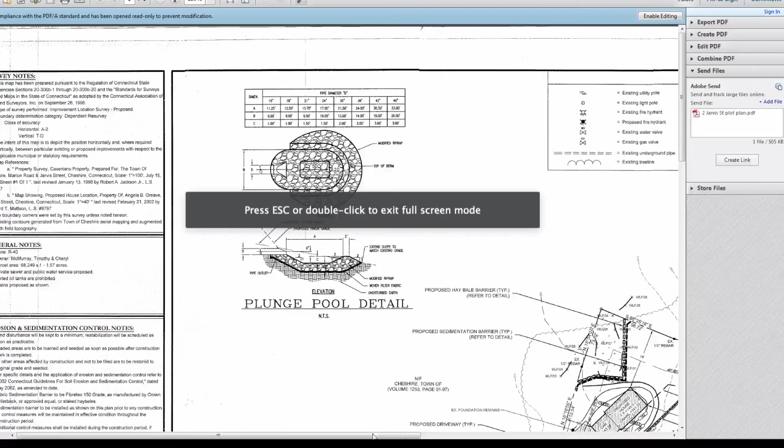And again, Charles, I'm just looking for clarification here because it almost makes sense to me that it's like this, or while it looks like an error, it also looks like it might be just illustrating that the 140 runs for a while and they just threw it in there. But I don't know. There it is. Can members see this okay? Yeah, okay.

140, 140. 138 is here. You don't have your little pointer thing? So we have the 140 - oh, there you go. Thank you - and 140, and where's the 138? Okay, gotcha. If you carry them to where they join existing contours, it looks like one of them joins the existing 140 and the other 140 joins the existing 142.

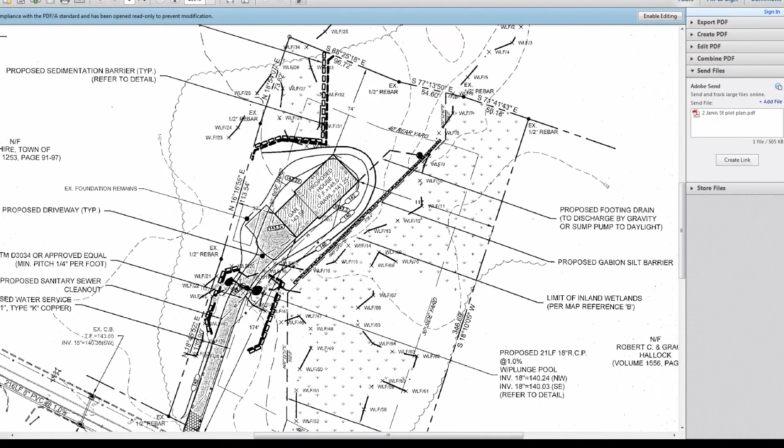So that is going to have to be a clarification from the person that designed the site plan. Yeah, it doesn't affect the overall plan in that when they finally go out there and do that, they're just going to have to make it work with a bulldozer or a tractor anyway. It still has to go from point A to point B, and whether the topos are named or not, the water needs to flow the way they want the water to flow.

So other than that, our major concern from the beginning has been that this house is awfully close to the wetlands on the eastern side there, and there are erosion controls being proposed here. The thing that worries me as much as anything else is we've seen sites like this where it looks fine on paper, and then on the site itself, we start running into problems. I think some of you remember some of these other sites where you're putting fill in fairly close to an actual wetland, as is happening near at least the front of the house there. So I'm not necessarily opposed to what's being proposed here, I just want to make absolutely certain that we've got the proper protection and inspection on this going in.

On another issue, did you determine whether a conservation easement was established, or is that something that was not? In looking at the land records, I did not find any conservation easement that was created and recorded on the land records. It was mentioned in the 2002 approval, it was a stipulation of that approval, but since that site was not developed, I believe there was no reason to institute that easement.

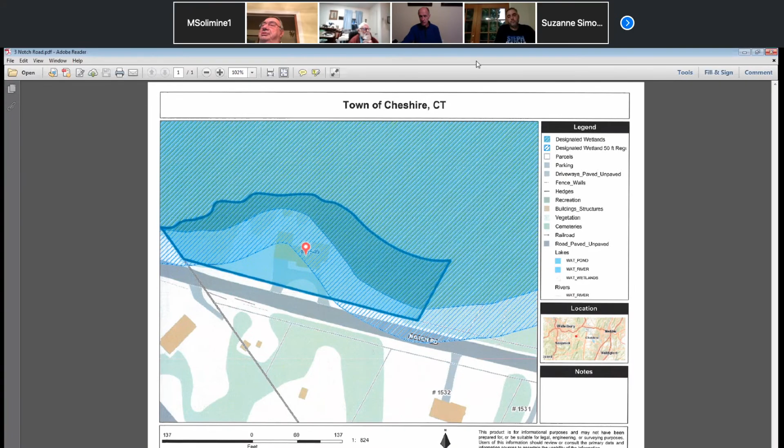Is there a motion to declare it insignificant in regard to the wetlands requirements? Yeah, I will so move that the proposed activities are insignificant in terms of disturbance of the wetland environment and therefore would not require a permit under our regulations. I'll second that.

Moved and seconded. Any discussion? Seeing none, all those in favor of the motion, say aye. Aye. Opposed? Motion carried by those commission members present.

Thank you, everyone. On to the next item of new business. So, Suzanne, you're all set as far as this is concerned for 1540 Notch Road. You'll just need to fill out a zoning permit, and that'll get processed through our office, and I'll be able to indicate that a wetlands permit is not needed.

Yeah, we did already last week. He was waiting on the wetlands decision. Okay, all right, then I'll follow up with Mike and we'll get that processed. Thank you. Thank you so much. Okay, you're welcome. Thank you, everybody. Stay safe. Thank you too.

Okay, Suzanne, item number 2. Yes, the second item under new business is a new application for a site plan, home and grading on Coleman Road. Representing this application is Dennis McMorrow, who is on our screen. Hello, evening, Dennis, how are you? Good, how are you? I'm great, thanks.

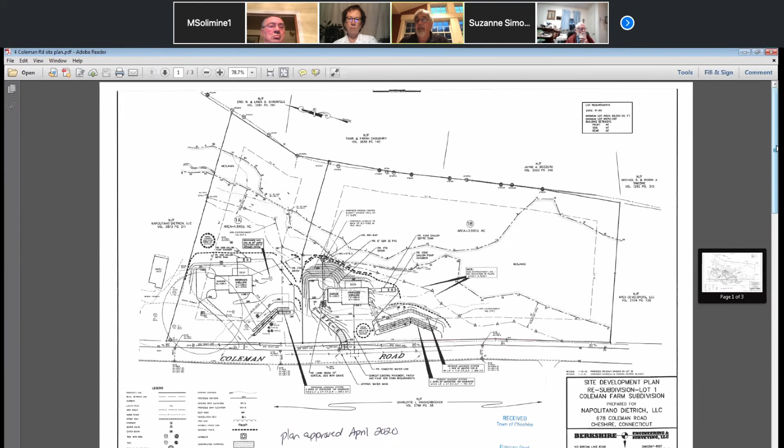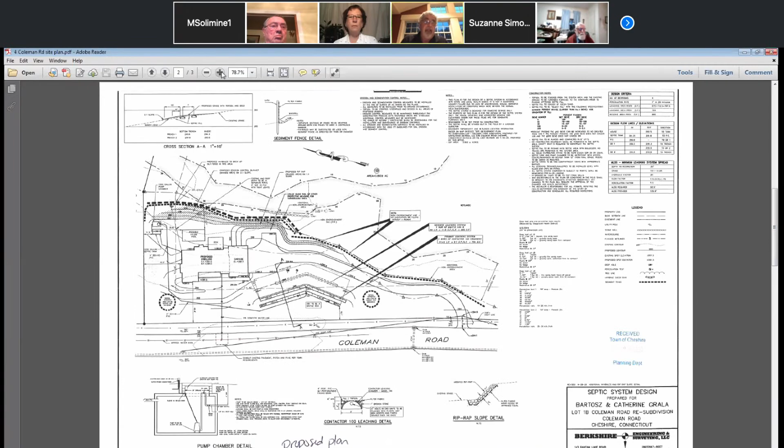The Gralas purchased Lot 1B from Napolitano Dietrich, and they're looking to construct a house for themselves and live there. The goal for this new plan is to get a little bit of a backyard. On the previous plan that we just moved away from, there's really no backyard - everything's to the side. So what we looked at was, could we find another driveway location that would meet the sight lines that the traffic authority would want for Coleman Road?

And we did find that - the driveway is about 300 feet to the south of the property. So we're looking at that site plan. The driveway is now coming in from the south side. It's a much flatter driveway - we have a maximum slope of about 2% on this driveway versus the 10%. The trade-off is it's about twice as long as the other driveway, 140 feet versus this 300 feet.

But it does a couple of things that are positive. One, it meets the sightline criteria - I did have a discussion with traffic. Two, we only have an 8-foot high fill slope going down to the wetlands instead of a 14-foot high fill slope, so we've almost cut the depth in half.

Part of it by the turnaround is a 1-to-1 rock slope, and I'll get into that in a minute. But we're still only an 8-foot high slope, whether it's 2-to-1 with fabric or 1-to-1 with the stone face on it. We couldn't - go ahead, you have a question?

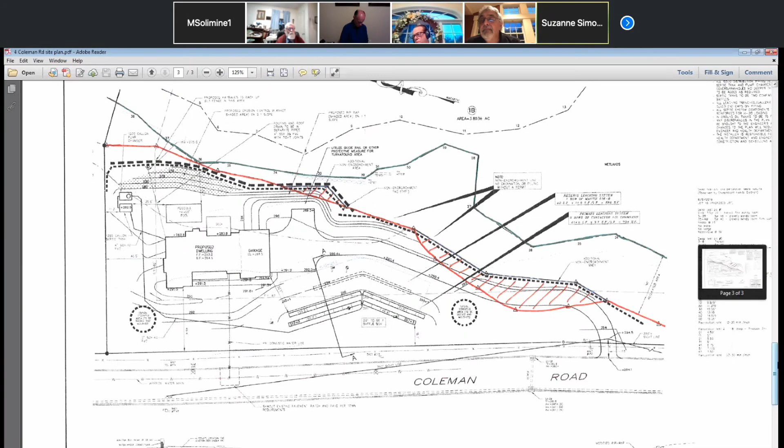Dennis, moving back to the proposed plan, these non-encroachment markers appear to bisect the driveway. They seem to be remnants from what was approved previously. Those are the actual non-encroachment markers approved from the subdivision that we staked out and might have even put up, so they'd have to be taken down and moved to the new location we're showing.

Installing it here wouldn't make sense, because that would require this little area to be kept in its natural vegetative state. So this was to clarify where it used to be, and we labeled that purple line as additional non-encroachment area. I should have said to remove the old markers and move them to the new location.

I know we staked those for Andy Napolitano. I don't know if he actually put those posts and markers up before he sold the property. If they are up, they'll have to be moved to the new location because we have a driveway going to it.

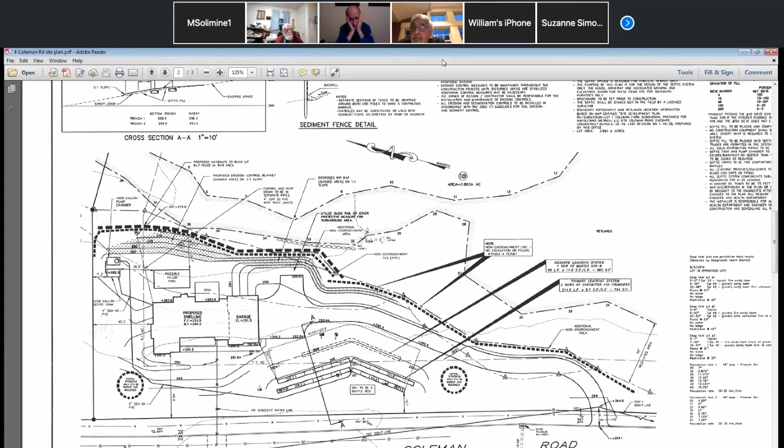Are there any further questions or comments? Do we have enough information? I think I'm comfortable with it. So should I prepare a draft for the next meeting? I would say so, there's no recommendation for a hearing or further information. I think we're ready to go with the proposal, Suzanne. Okay, very good, I would agree. I have no objections.

Thank you. All set? All set, I believe so. Okay, thank you, Dennis. Thank you, I'll see you in 2 weeks.

Item number 3 is a permit application from Lamp Realty, located on Hazel Drive. It's a site plan for 2 residential buildings totaling 114 units. Members may recall there's a development already on the site, and this plan would demolish it and rebuild in the same general area. Representing the applicant tonight we have attorney Joe Williams and engineer Ryan McAvoy, and the representative for the owner is also in our meeting tonight. I'll hand it over to Ryan or Joe for the introduction.

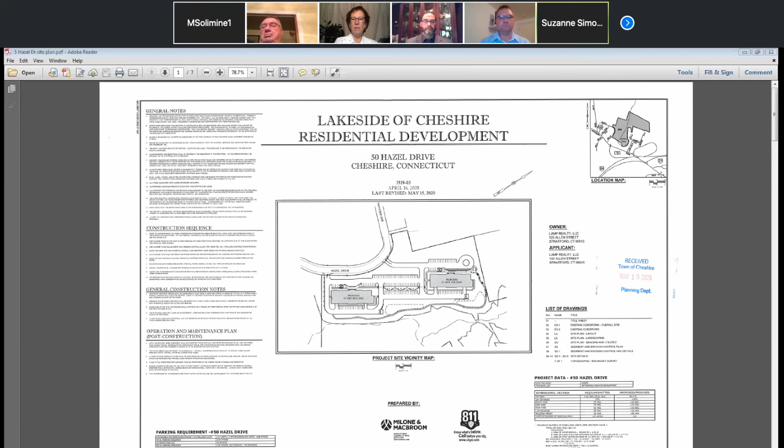So the property, as I mentioned, is very irregular in shape. The primary frontage is on Hazel Drive, which is at the top of your map. Secondary frontages to the east, or the bottom side of your sheet, are on Larson Avenue and Lakeview Avenue. The property is bifurcated from north to south, or from right to left on this map, by a watercourse wetland system that drains towards Larsen's Pond, located on the left side of this sheet in the south central portion of the site.

The eastern side of the property has some wetland fingers, and some disturbed areas associated with historical septic system leaching fields. Our application is not focused on that particular part of the property. All of our activities, all our site plan activities, all our proposed improvements are focused on the west side of the property, or the top on this particular map.

What you see on the area between Hazel Drive and the pond are the remnants of what's left over from the old convalescent home on the site. There are two 3-story buildings in that location. There used to be several hundred patients and staff working on the site, a fairly large parking area, 2 driveways, and activities and filling that in some cases went right up to the edge of the pond.

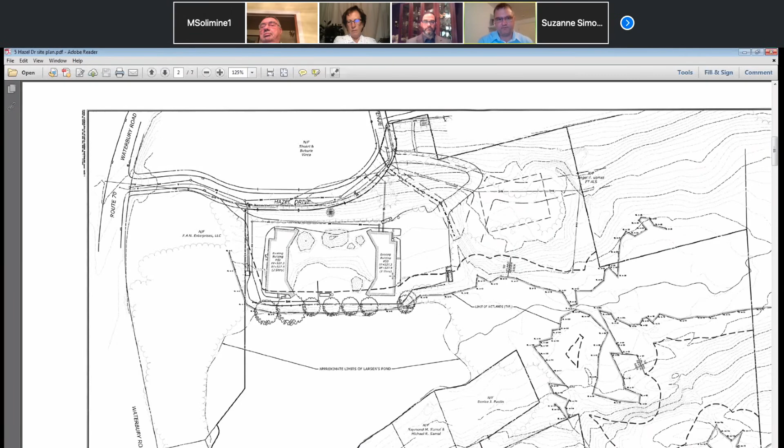In terms of our proposed plan, what we propose with this site plan is a multifamily residential development. You have two buildings of apartment units, each building will have 57 units. We will be constructing new parking and new access for these buildings off of Hazel Drive to improve sightline conditions from what is there currently. The buildings will have parking in the lower level and studio, one-bedroom, and two-bedroom units on upper floors.

The elements of the site plan I want to focus on for this application are the activities as you approach the wetlands and the pond itself. Namely, we will be demolishing the asphalt parking areas that are in close proximity to the wetlands, moving them further away, and also improving the vegetative buffer to the wetlands itself.

As you can see with this particular plan, we have a dashed line offset from the wetlands themselves, showing the activities within the upland review area. There are very few areas of proposed pavement that will fall within this upland review area, so we'll be pulling back quite a bit of the impervious surface in the vicinity of the wetlands.

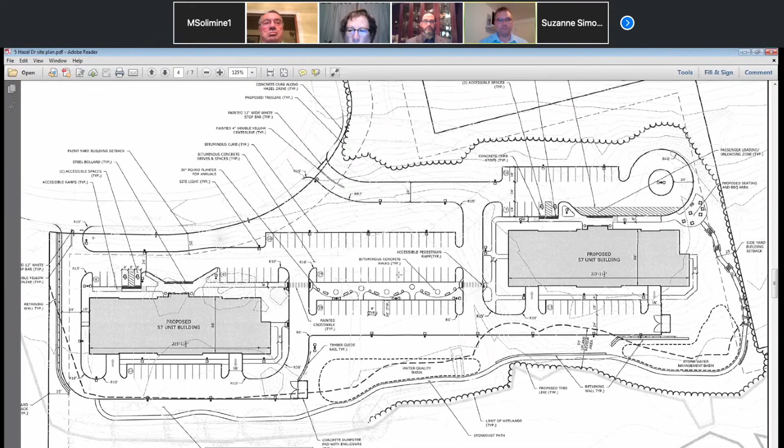Let's jump to the grading, which is the following sheet. So this is the grading and utility plan.

One significant improvement we're making with this plan compared to current conditions is the introduction of stormwater quality and stormwater management features on the site. Namely, all drainage from impervious surfaces, including parking, buildings, and other landscaped areas upland, will be captured in a conventional pipe and catch basin system and conveyed to two separate stormwater management basins.

The first basin is located in between the two buildings, just upgradient of the pond along a wetland edge. The second is further to the right on the sheet, or to the north, to the rear of the northerly of the two buildings.

These basins will include at the lower levels a water quality volume, which will detain and hold back the first inch of runoff, which includes the vast majority of your pollutants and sediment load. Each basin will have a sediment forebay where coarse sediments can be trapped in the first essentially quarter of the basin to allow for more easy maintenance.

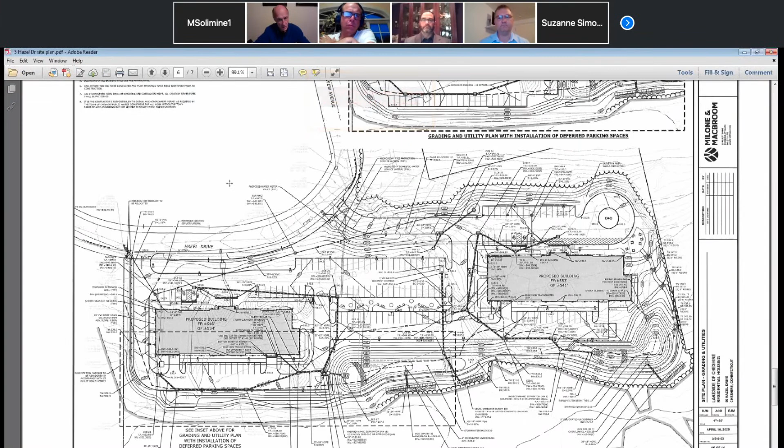Well, I know they've been on public water for, well, the old convalescent was on public water beginning, I believe, in the early 90s. Yeah. So I'm not familiar with how those wells may have... They were putting in wells in the 80s because they didn't have adequate supply, and then later they finally were able to connect to public water.

Now, you're regrading there. I'm trying to see where you're regrading, whether we've got erosion controls in place, or just what? Suzanne, would you be able to scroll to the next sheet, please? Mm-hmm.

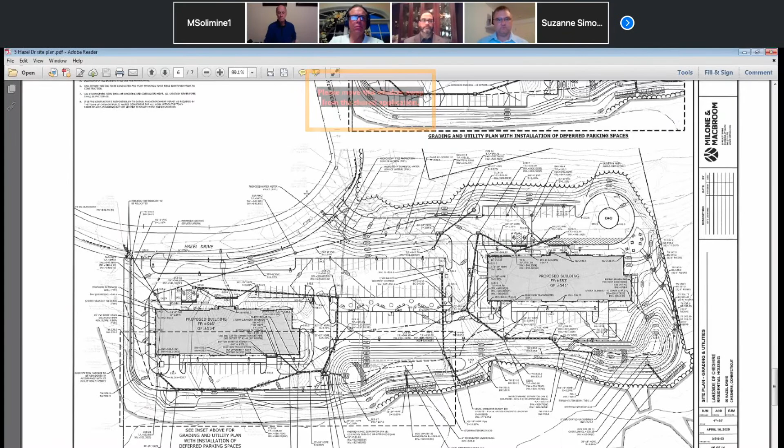Sure. So this is our sediment erosion control plan where we show, at the toe of all improvements and/or removals as the case is appropriate, silt fence and hay bales along the entire perimeter of activity. We also include three temporary sediment traps located southerly, northerly, and central to the site, where diversion swales will direct any accumulated runoff to these sediment traps for storage and infiltration before discharging toward the wetlands. These sediment basins will have to be maintained and cleaned when sediment reaches a foot deep, but we do have design elevations and dimensions for the construction of those sediment traps.

Any other questions of Mr. McAvoy? What is the end use of this proposed building? Is it still going to be an elderly home, or, sorry, maybe I missed this—it's going to be apartments. Any age restrictions or anything?

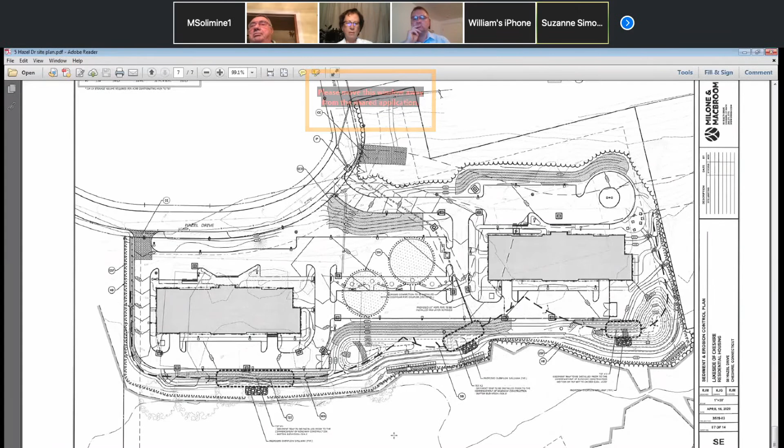Mr. Chairman, one thing I'd like to clarify: usually we use the Cheshire Herald to post notices for a public hearing. The Cheshire Herald was purchased by the Record Journal, and their deadline to submit notices has changed, so if we went with the Cheshire Herald we would not get the notice in for the next meeting—it would have to be the first meeting in July. However, I confirmed today that there is an executive order allowing, during this COVID-19 issue, the town to post notice on the website and forego submitting to newspapers. So if the commission wanted to hold the public hearing at the next meeting on June 16th, we could accommodate that by posting the notice on the town website.

I'm not sure if the commission wanted to go with the mainstream media, but what's required under the state statute is that it be a newspaper that has wide circulation in Cheshire. We sometimes use the Record Journal, but we try to use the Cheshire Herald most of the time since it's a local newspaper.

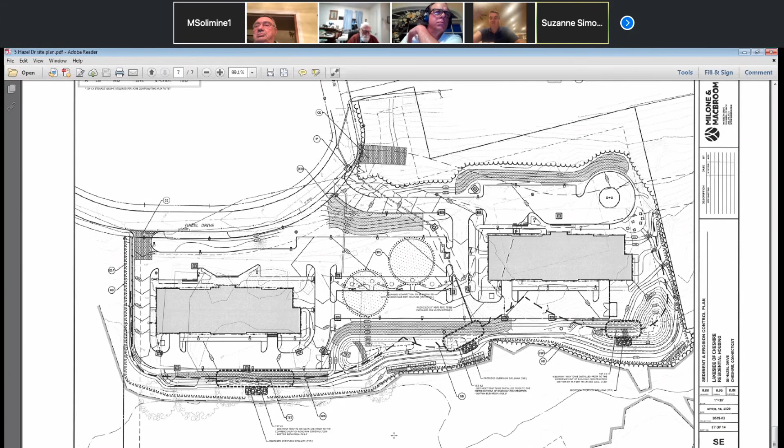Could not agree more. Okay, let's do it. Could there be a motion? I want to move that we, one, call this to a public hearing, and two, we put notice in both the town website and the Cheshire Herald.

Charles, do we have to have regulations? Is there a second to the motion first? I'm sorry, Earl, discussion. Charles, do we have to have some type of regulation stipulations for that, for the reason of having a public hearing? Yes, for purposes of public interest. Okay, just wanted to state that for the record.

Thank you, Will. I'll second that motion. Any discussion? All in favor of the motion, please say aye. Aye. Opposed? Motion carried by all commission members present.

Mr. Chairman, and thank you all, and we're happy to talk with you again about it. Could you confirm what date we're looking at for the hearing? Because we're just looking ahead to when our zoning hearing will be as well.

So the soonest that this would be able to be scheduled would be the meeting of Tuesday, June 16th. And if that date does not work for you, the next available meeting date would be Tuesday, July 7th. I think we're okay for the 16th, Ryan and Tony. Okay, I would have to have Ted Hart fill in for me in the role on the 16th, which he's watching on YouTube right now, so it shouldn't be a problem on our end.

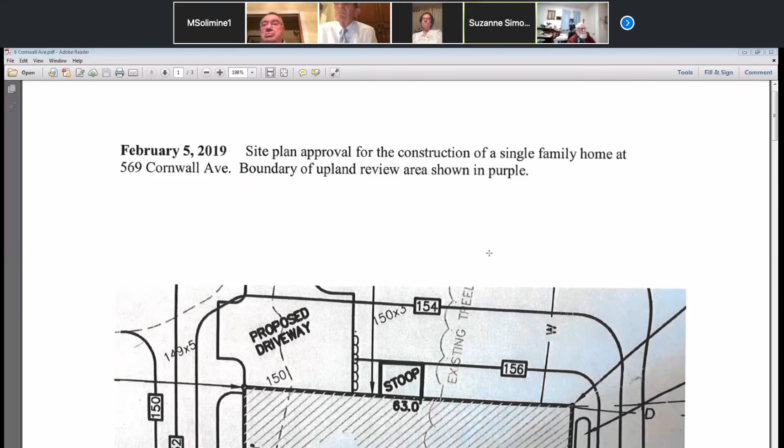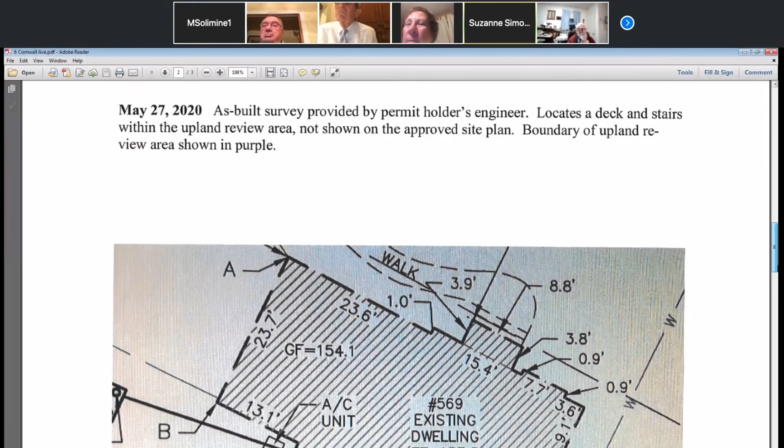So this was the site plan that was approved February 5th of 2019. It shows the house and the upland review area, which is this purple line. And this is the as-built that was provided May 27th, and it shows a change to the plan in the upland review area.

Suzanne, can you go back to the first one? Sure, thank you.

It looks to me like the original plan was almost just like a box that wasn't necessarily the house. It's so nondescript other than the stoop. I noticed there's quite a bit more detail in the as-built. The house seems to have a little more character, jigs and jogs, if you will. And it looks like the deck, as we look at the old site plan, is on the right bottom side of it. This is what's on the screen right now is the approved plan.

So it did not locate any stairs. This was the approved site plan. But what I'm getting at is that the approved site plan seems to have just a rectangular box, and the house seems to be a different shape. Is that true?

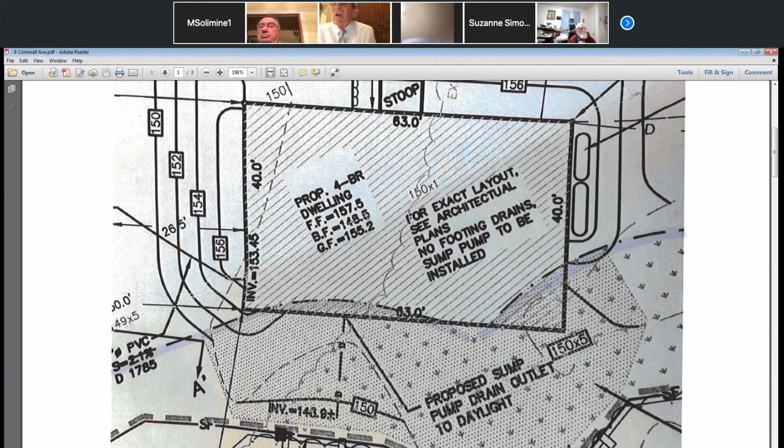I think that is correct. Yes, all right, there it is. So it almost looks like... it's hard to see without overlaying these what actually is different about it, because this isn't defined as a box.

Mr. Norbeck, I think the box is certainly bigger than the ultimate footprint of the house, but I think the rear line of the box pretty much corresponds with the location in the as-built. Well, that's what I'm thinking, it's hard to see. I'm looking at a pretty small as-built here, but it looks like that landing and stairs is more or less within the footprint of the approved plan.

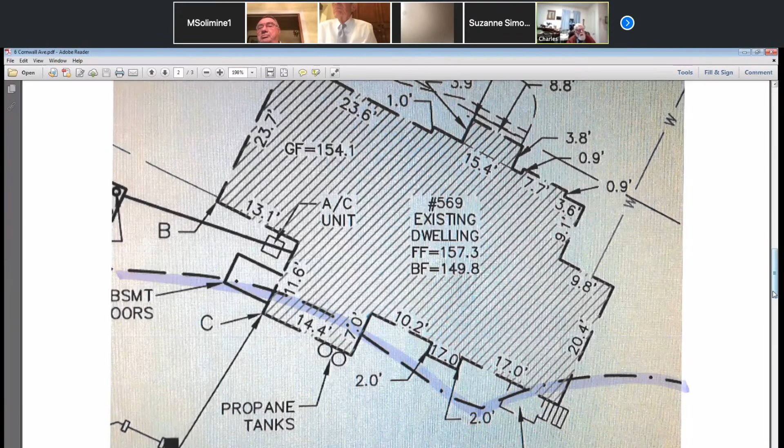Let's go back and take a look at the first one. Now that we see where the landing and stairs are, it ought to be possible to tell. Yeah, Tom, that makes sense. So to me, it doesn't look like it's doing anything unusual. While he may not have come specifically for a permit for that, if it is indeed part of the house, it appears to fit within the box that we approved, within about 5 or 6 square feet, so I think it's close enough.

Yeah, it just doesn't... but didn't we in the minutes require that they come back for that? The minutes, well, I think Suzanne attached to it.

I think part of the reason this is resonating with me is that, if I recall, Mr. Barnett was out of town at a graduation, and his father-in-law came in instead. It looked like he was a little befuddled by some of the questions, and it looked like the permit was not going to be granted.

And I think one of our learned commission members, a builder, suggested that he nix the deck on the plan to assure that the proposed plan could go through. I vaguely remember suggesting that, which may have been Tom out of line, but I may have done that.

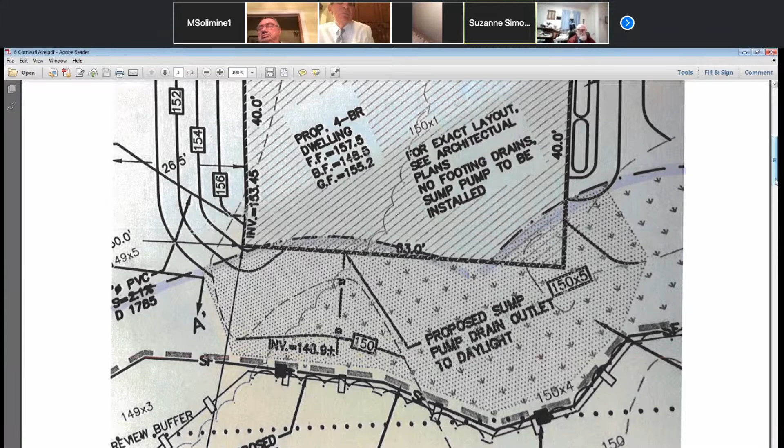And Attorney Fazone? My opening here, when I made comments, I really think it's almost not even fair to call it disturbance. I think this structure, such as it is, is within the area that was approved to have the footprint of the house in. So if we didn't call this a landing or a deck, it's within the footprint that was approved.

I don't think he's asking for anything. I mean, just because it happens to be an appendage on the house and not heated space, it's within the footprint, I think, that we approved. Within a foot or so, Tom, and I'm not gonna go and quibble about a foot or two under the circumstances.

Yeah, I just think to me it seems like it's okay. It falls within the permit we gave him. It's just a deck or a landing instead of the structure. And...

So would we be able to approve an application for this, or are you saying it doesn't matter? Because it seems that if we say it doesn't matter, that's totally contradictory to what we said at the meeting of May 7th, 2019 on page 4, when both Chairman DeJong and Dr. Dimick said we specifically needed a separate application for this. And I don't know that we can do the opposite of what we said needs to be done.

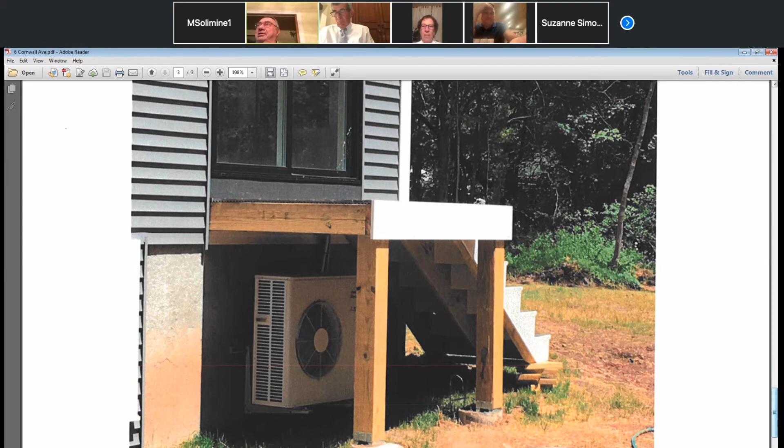Moved and seconded. Any discussion? If not, I think we should vote, but we may need to know how many people are voting in favor of this motion. Is that understood, or is there a problem with that? Nope, that's understood. Okay, should we vote by individual? Yep.

I'll vote in favor of this motion. So am I supposed to do the roll call, or does Suzanne? We've never done a roll call before. Would you like me to call down the list? Yes, that would be great. Sure, would you like me?

Okay, so I'll call down the list, starting with Chairman Kurtz, No. Vice Chairman Dr. Dimick, Aye. Secretary Carrie Dunn, No. Dave Brzezowski, In favor. Will McPhee, No. Tom Norback, Aye.

Okay, so we have 6 members and it's 3-3. So the motion failed. Motion fails.

So we need to require a permit after the fact then. Should we caucus, or do we have an easier way out? I don't know. I think because the motion fails on the tie vote, the motion fails, then the next step down the line was the proposal to ask to file a permit after the fact.